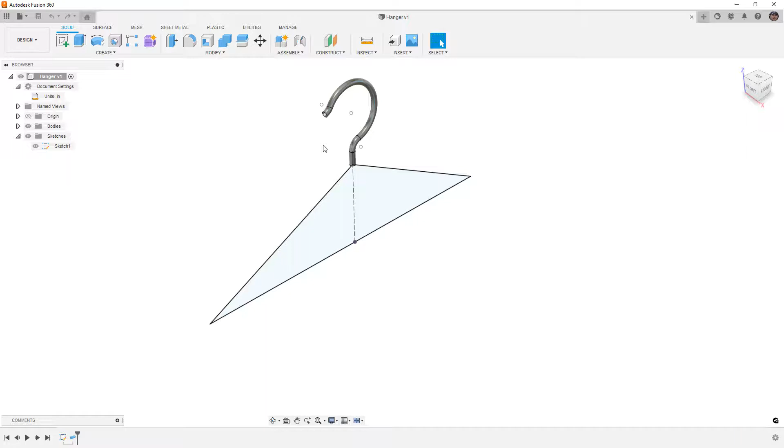But what we're going to do is use the Forms tools and try to figure out how we can model something like this. So to get started, the first thing with Forms, if you haven't seen any of the other Forms videos, is you always want to think about the starting shape.

Now we talked about this with the golf club, and in that case we ended up using, I believe it was a Quadball, but we have to really think about the shapes that we're using and how we want to build our designs.

So what we're going to do is build something that's symmetric, at least at the start, and we're going to use the symmetry plane to make sure we are keeping that symmetry, kind of preventing us from over modeling the thing.

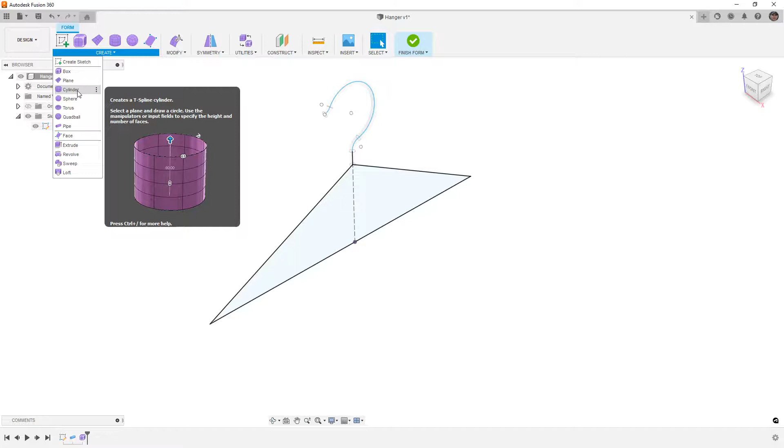And what I mean by that is we can extrude and build the cylinder out to make the shape of the hanger that we want. But the specific one I'm talking about probably is more in line with the box shape. So we're going to start with the box shape and learn how to use that to make our hanger. So I'm going to start with box.

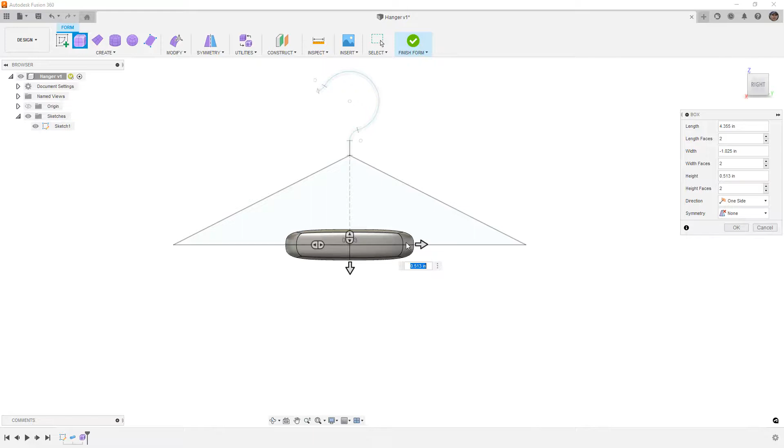I am going to begin on what is my right plane, and that is going to be my YZ plane. And then I'm going to draw this thing just centered at the origin, and this is going to be our starting shape. We're going to pull it in, make sure that we do have symmetry, and we want to make sure that we have length symmetry.

I'm going to set this to make sure that we are going about the origin. So you can see we started at the origin - that green line is right where we want it, and that's going to work just fine.

If you want to have symmetry front and back, you can also add width symmetry and height symmetry depending on your design. In this case, all we really care about is length. I'm not really too worried about any of the other parameters because it's all going to get changed.

The next thing that I want to do is instantly change this to box display, which is going to be Alt and 1 on the keyboard. You can also go to display mode and change it here.

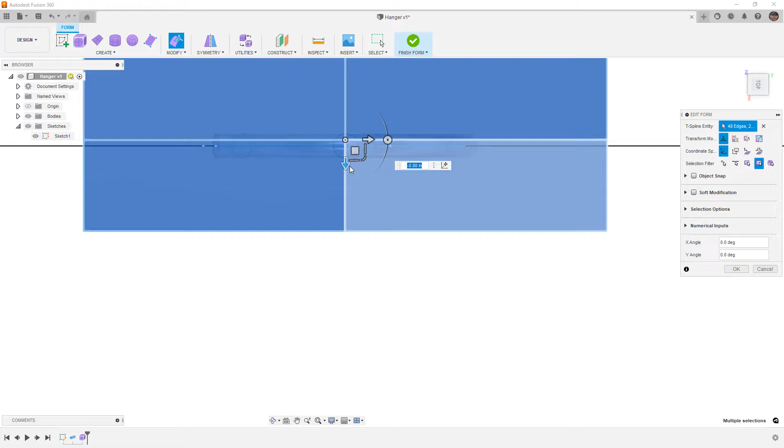I'm going to move this entire thing using modify, edit form, and I'm just going to push it back. It doesn't have to be symmetric here, but I'm just going to go ahead and push it back to roughly at the origin - looks like minus 0.75 will get me there. Then left click to deselect it.

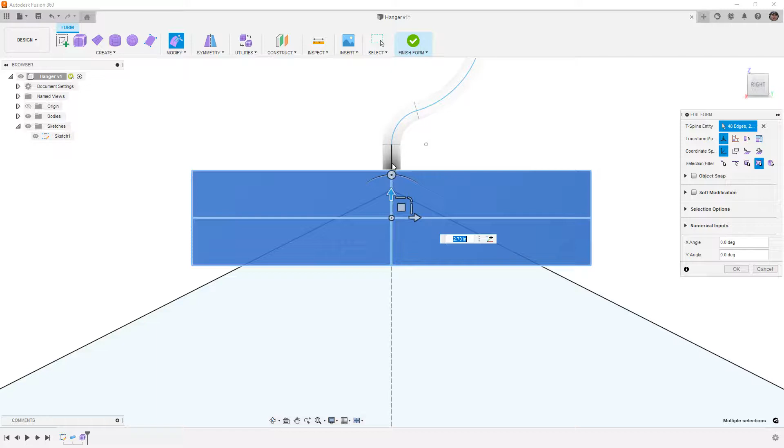Now that we have this box shape, what we want to do is push it up towards our hook and begin designing this. So I'm going to take the entire thing once more and just bring it up until it looks about right. It doesn't have to be perfect, but I am going to make sure that I embed that hook in there a little bit so that it's got a nice overlap.

Now the point where we have to start changing the shape. So the first thing that I want to do is I'm going to take this left side and I'm going to rotate it and then move it in plane. Now the reason I'm doing that is because what I'm looking to do with my sketch that I have underneath here is I'm looking to maintain a parallel relationship, at least at the start right now, with the edges of my form. So that means that this edge here, I want to be essentially perpendicular to that line. And it doesn't have to be perfect, we're only doing this visually, but that's essentially my starting point.

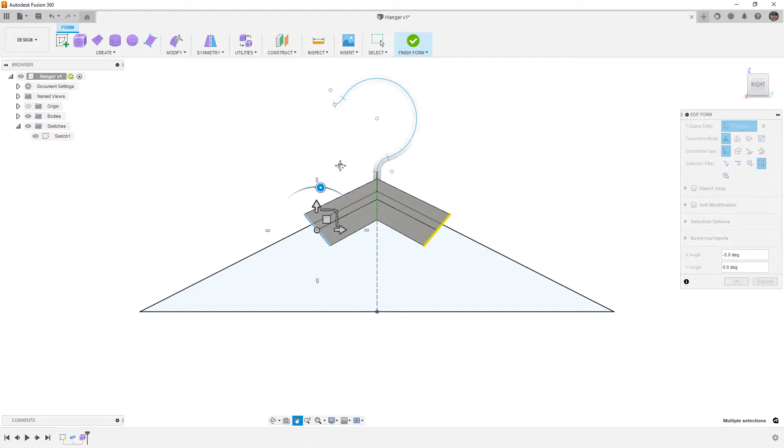Now, there is currently a potential issue with forms. If I use Alt and 1 and Alt and 3 to go back and forth between box and smooth display, it's actually going to change the dialog here. So you have to left click in the canvas area to deselect, and then you can go back and forth between smooth and box display.

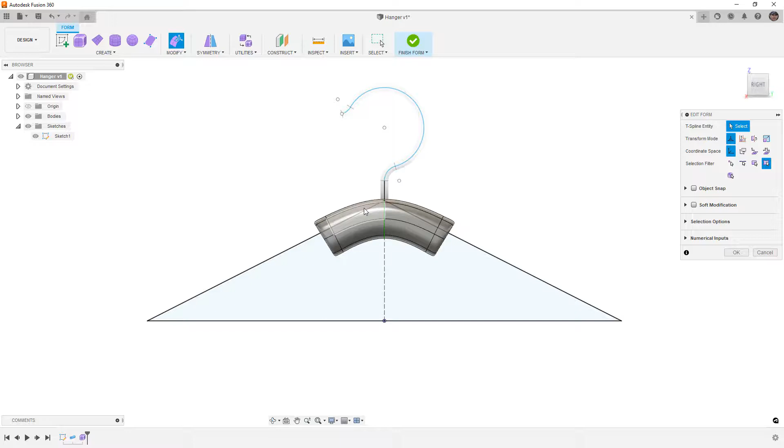So you can see here what we have is we've kind of got the starting shape here for our hanger. You will notice that these edges, when I go to smooth display, I've got these edges that are kind of floating out here. When I go back to box display, well, I can't do that because I have to deselect it again. But if I go back to box display, there is an extra set of edges here that we're not seeing. So this is a potential problem because in smooth display, we have these edges here, and then we've got this sort of rollover that happens.

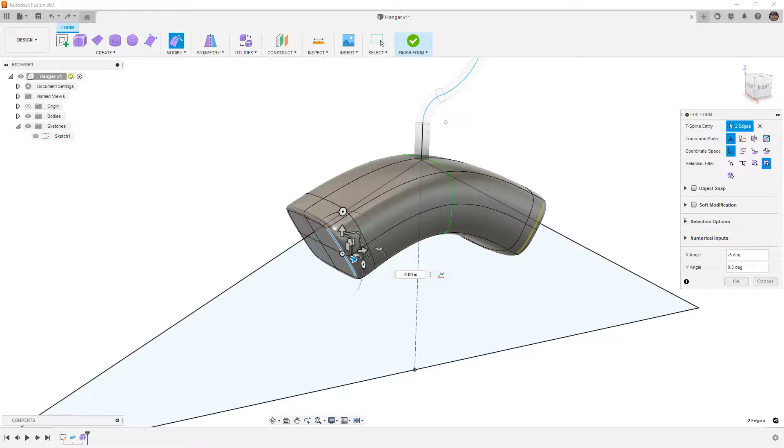So if I take a look at this edge and I go back to my selection options and I go to box display, I essentially have two sets of edges that are overlapping each other. And this is very easy to happen. It happens quite a bit when you start manipulating forms, and it's something that you need to be very careful with.

So what I'm going to do is go to smooth display, and I'm going to get out of edit form. I'm going to double click on this edge and hit delete. Now I know that doesn't look very appealing, but this gets rid of those extra edges. Now I don't have to worry about double edges here. If I start to move this, you can see we've only got the one set of edges. So Control Z to undo that move.

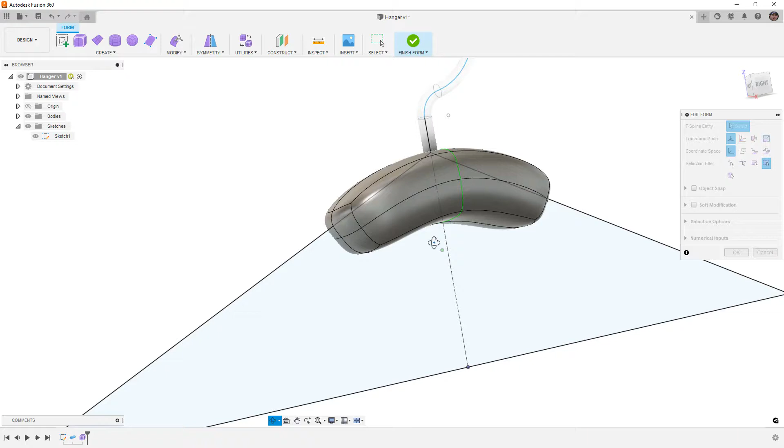Now what we have to do is we have to think about how we're going to build this shape. Right now, what we have is just essentially this melted looking square, right? We've just kind of moved a few things around. A couple things that are going to happen. We have to think about the shape in this right view. We also have to think about the shape in the top view because it's going to taper in and taper back out. So again, I like to model in box display. So Alt and 1, I'm going to make sure that I do that. And then I need to extrude some geometry.

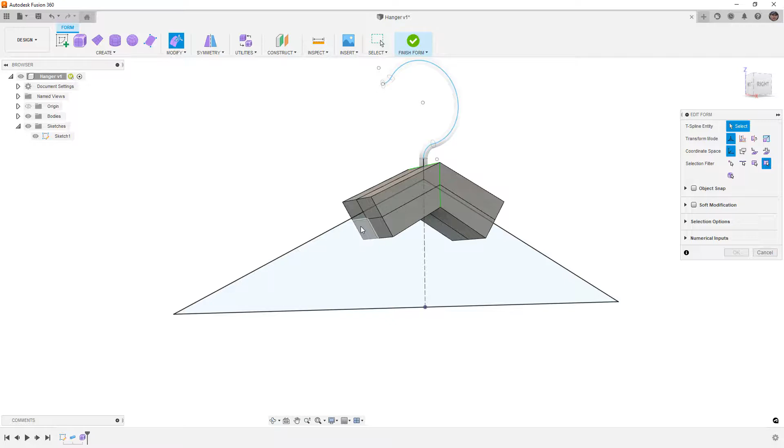Now at this point, we've got faces on the end, which kind of complicates the process. But what we can do is we can delete them if we don't want them right now, or we can select them and extrude them. So if I select all of these faces and then I hold Alt down to extrude them, what we're doing is we're essentially taking those faces and we're pulling them out. If I go to smooth display, we don't have any overlapping edges. So this is perfectly fine.

A lot of times what I'll do is I will delete those faces because then it lets me double click the edge and grab the entire edge. We have to be careful about our selection. It's always going to matter. So in this case, what I'm going to do is I'm just going to make sure that I'm kind of following the shape, but we are going to slightly taper down.

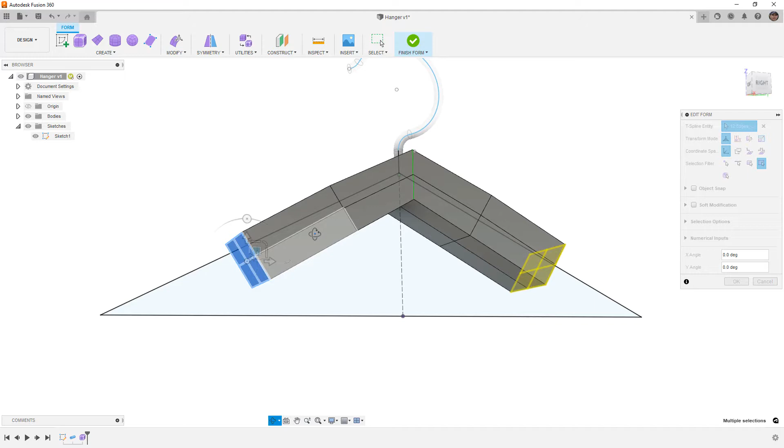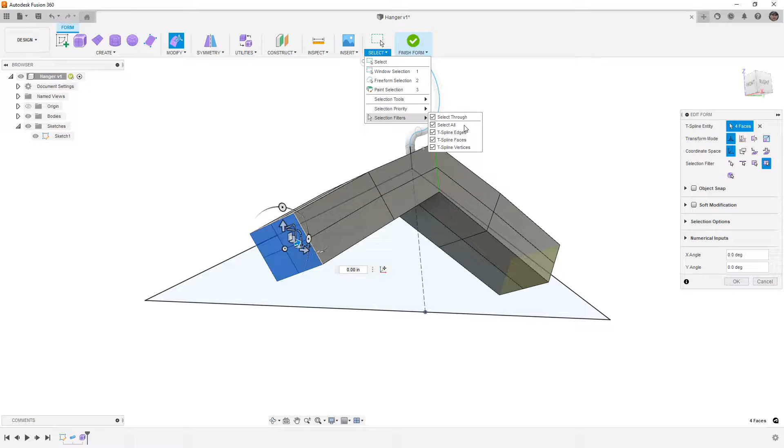And then once more, I'm going to extrude one more time, hold down Alt, and you'll notice that this doesn't work. Now the reason this doesn't work is because when we box select, we're also getting edges, and we can't extrude the edges and the faces together. So you either need to manually select those faces or go to your selection priorities and filters and only select T-spline faces, and that will allow you to do the box selection.

I typically work with edges instead of faces, so I generally don't turn off those selection filters. But sometimes if you're modeling designs like this, it'll be very helpful to be able to play around with this. All right, so smooth display, this is what our hanger looks like.

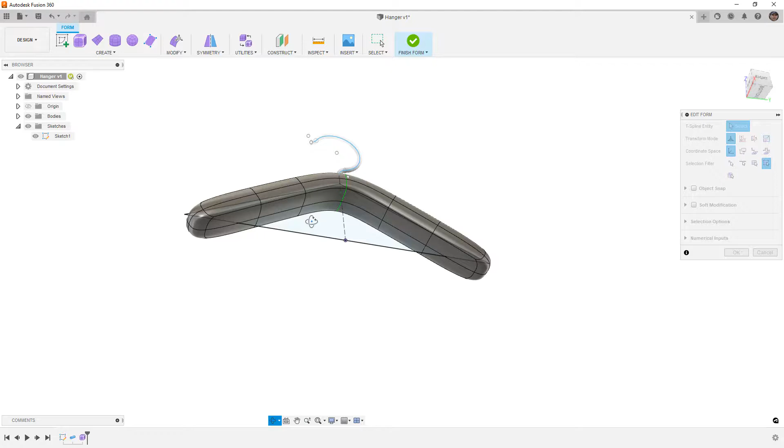It's not very appealing yet. It doesn't look very good, but we're not even close to being done. Right now, we don't need the sketch anymore, but what we do need to consider is the shape. So back to box display, I'm going to view this from the top. Now at the very top, it's going to be a bit wider, so I'm going to double click that edge, and I'm going to scale it in the X direction. So it's going to make that wider there.

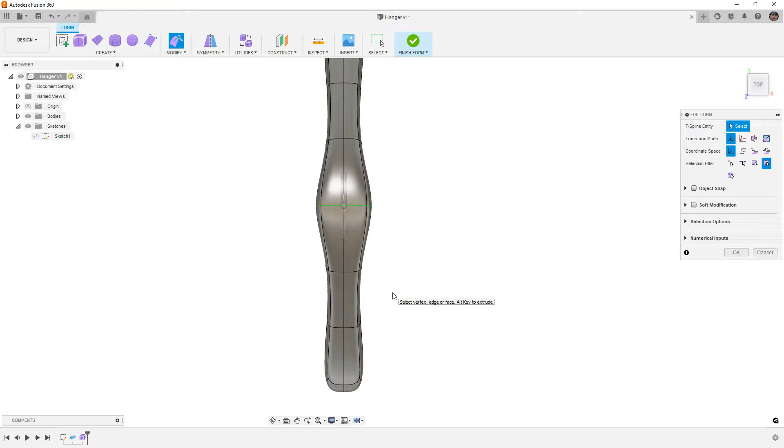And then I'm going to left click, then go to Alt 3 to check the smooth display. So you can see it's nice and wide there, and go back to box display. I'm going to take this one, I'm going to scale this one in the X direction. So all we're doing is we're changing the shape in X. We're taking this exact box shape and we're scaling it down in X. Once again, smooth display, you can see that we've kind of added a bit of geometry there.

Next, we're going to do this from another view. I think it's very important when you're trying to get these visual references that you really think about the orientation that you're working in. So now I'm going to select this, and this is a bit tricky because when we were scaling it horizontally or in the X direction from the top, it didn't really matter that we weren't in line here. But now if I try to scale this down vertically, it's going to start twisting it, and that might not be the result I want.

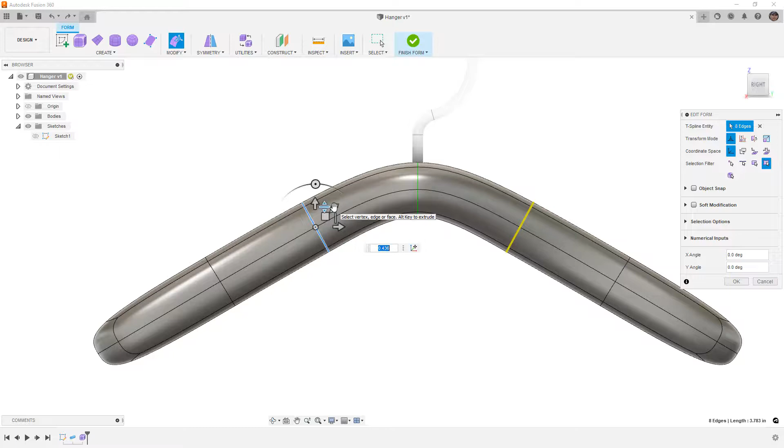We can scale down in plane, which will be Y and Z, and notice that it moves it a little bit, which is okay. And I'm going to do that again here. I'm going to scale that down, making it a bit wider at the end. So we're going to rotate this around and maybe take this one and scale it horizontally in the X a bit more just to give it a bit more shape.

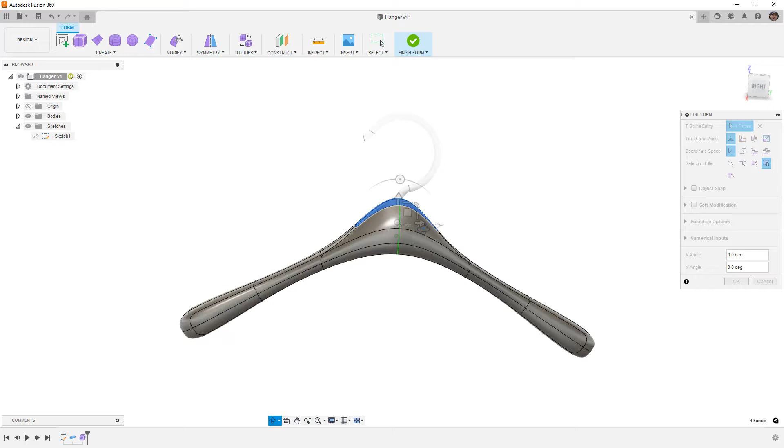Next, I'm going to select these upper faces. I need to select them across the center. I want to make sure that I get everything. I'm going to hold down Alt and extrude this up to add a bit more geometry. And with that face selected, I'm going to scale it down in the Y direction and then scale it down in X, sort of taper it a bit. And you'll notice that, again, that doesn't look very good. It's bulging up quite a bit.

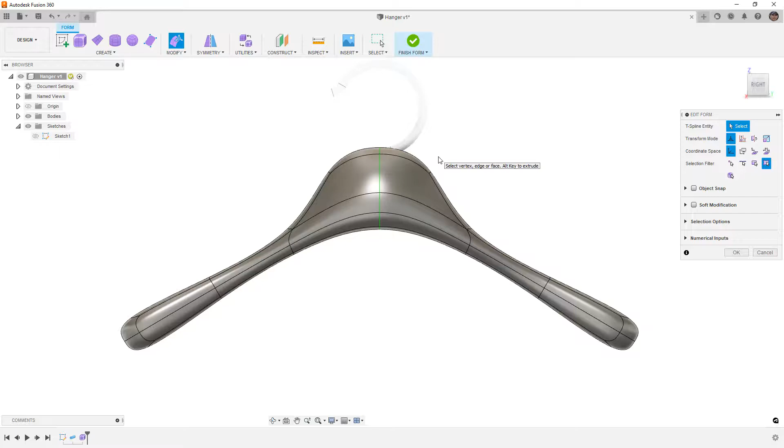Now, a couple ways that we can fix this is we can flatten that geometry. So if we take these edges here, we can pull them up to try to flatten it. And when we look at this, you can see that it's starting to sort of flatten out. But essentially what we're going to do is we're going to roughly build the shape, and then we're going to cut it later with a sketch. We want the top to be perfectly flat. So all we really care about is that we're getting roughly the right shape, and it doesn't have to be perfect. So I think that looks okay. And we're gonna go ahead and cut that away after we're done.

Some other things that we want to do is we want to change the way in which this bottom section turns. So we need to add some more geometry. The way that I'm going to do that is by going to a command called Insert Edge. We're going to double click on an edge. So let's go ahead and make sure that we're grabbing this entire loop here. I'm going to use a simple insertion mode and just drag it down about halfway. It doesn't have to be perfect. Make sure that it is simple, and we'll say OK.

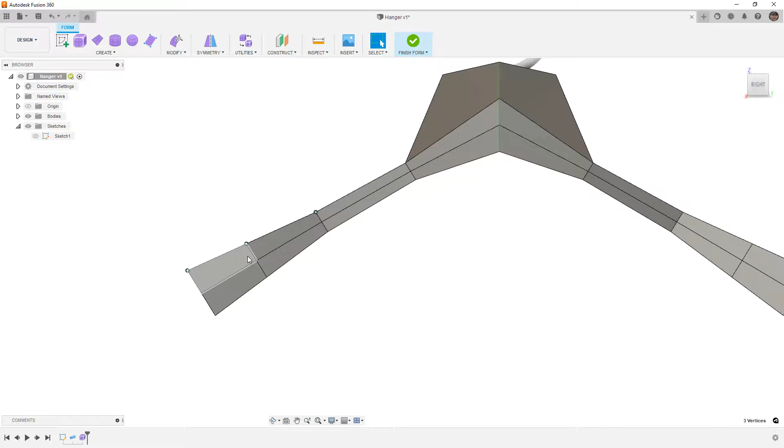Now the simple insertion mode will put the edges exactly where you say you want them. In this case, about halfway, minus 0.53, I think is what we did. But the thing that's important is that these vertices don't remain in a straight line, because this is going to affect our curvature, and it's not what we want. So I'm going to take this and I'm going to scale it down just a little bit. Then I'm going to take this edge here, and we're going to rotate this and just move it down a little bit. So when we take a look at this at Smooth Display, you can see we're starting to get that sort of transition, that arc shape.

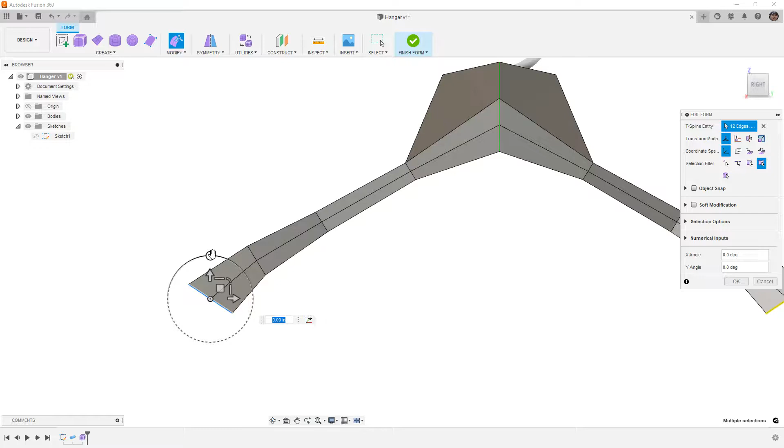I'm probably going to do a bit more work in this corner. So let's rotate it just a little bit more, maybe bring it down. We can move this one up a bit. And again, take a look. It's looking okay.

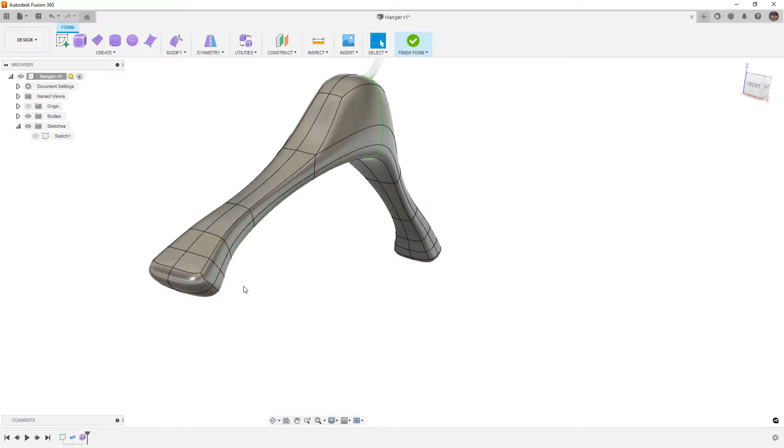I think I want to scale this in a bit in this direction and probably add another edge. So with that edge selected, I'm going to go to Insert Edge, go back to Box Display, because again, we want to make sure that we don't have just a flat section here. And I'm going to scale this one out a little bit.

I'm going to go to my right-hand view. You can double click your mouse wheel, the scroll wheel, to zoom to fit. And then I'm going to scale this one out just a little bit and move it up. So what I'm looking at here is the transition, or the change in angle for these outside edges and the change in angle for these inside edges. So when I look at this, you can see we've got that wider outside section, so it would be like the shoulder of a shirt. And then we have the sort of transitions here.

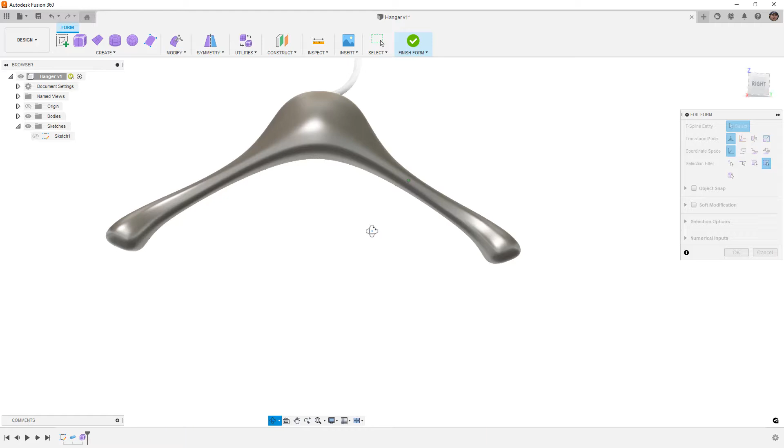Now, at this point, I'm going to use Control and 4 on my keyboard. You can also go to your display settings and go just to shaded. What this does is it's going to hide my edges, and just take a look at the shape. See if you're happy with the shape that you're getting. Now, this shape has some tighter transitions on it. Control and 6 will bring those edges back. You can also go to Visual Style, Shaded with Visible Edges.

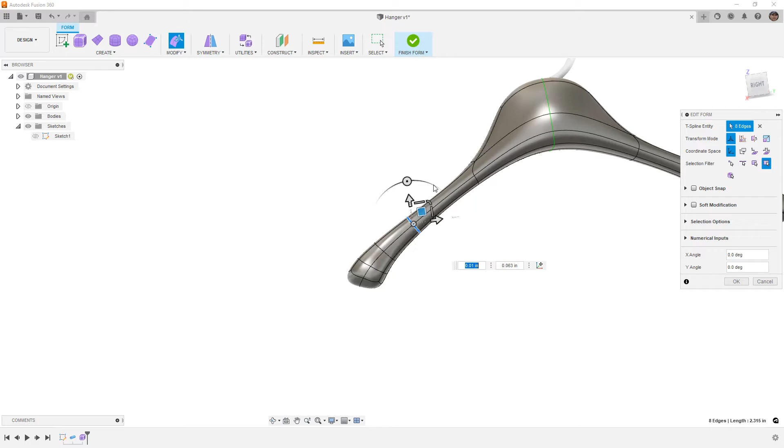And I think that I made a mistake here. I want to widen this out a little bit and maybe move it just a little bit. And I think I want to add some more control in this area. So I'm going to double click that midsection. I'm going to go to Insert Edge. Single doesn't really matter because we have symmetry. It's going to automatically add one to the other side. And then in Box Display, remember, we want to make sure that it's not flat.

So we're going to use Modify, Edit Form. We're going to bring that up a little bit. Maybe take both of these, pull them up just a hair, and then see what that looks like. I think this section is probably a bit too wide. So again, what we want to do is we want to take the entire thing.

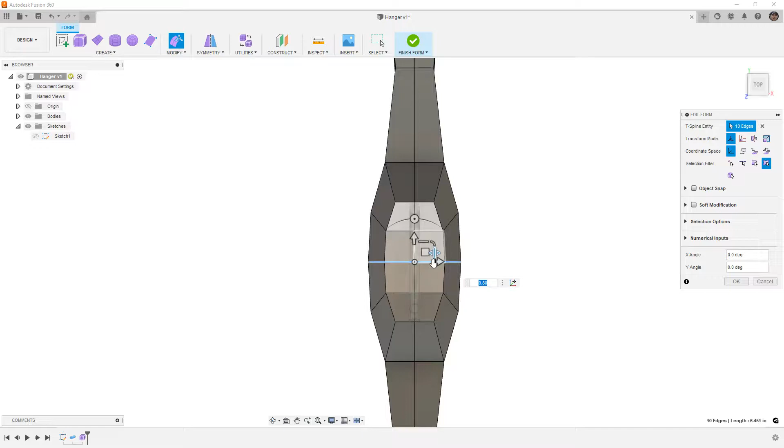So I'm going to go to a top view, take this entire edge, and I'm going to scale it in. I'm going to take the next entire edge, double clicking, and scale that in a bit. And then this one here, I'm probably going to scale that in just a little bit. It's only going to be the top just because it's not a complete loop, because we have what's called a star point here. But then let's take a look at this in Smooth Display.

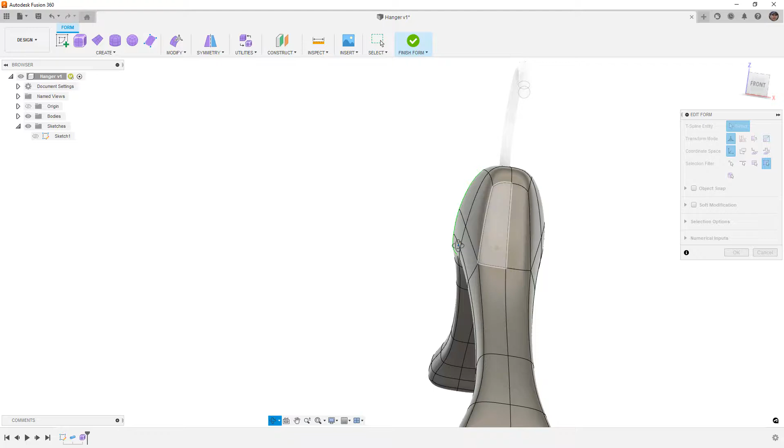So I think everything there looks okay. Remember, we are going to make some cuts to the top. We're not too worried about it being the final shape. And we are actually going to make some cuts to the bottom as well. But I think this looks pretty good so far.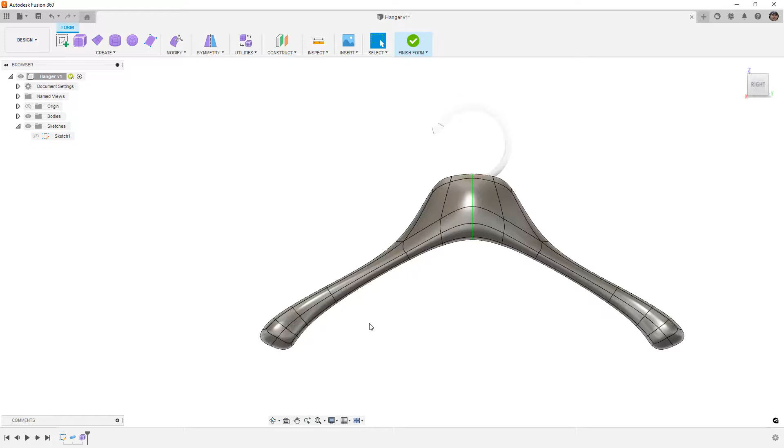A couple other topics that I want to make sure that we capture here is that we want to understand how to control the curvature. So right now, if I hide the edges, the transitions are pretty tight, but that's just based off of the geometry that we're working with. If we want those to be a bit softer, what we need to do is we need to change the shape of this edge. We need to give it a more gradual transition.

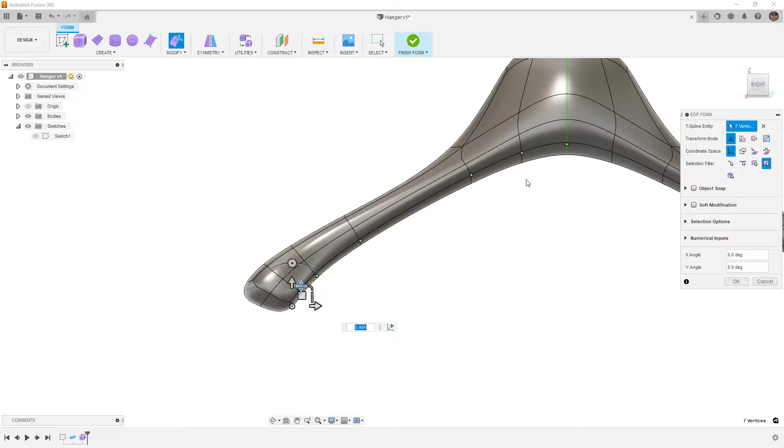So I'm going to do this with vertex selection. I'm going to go in and select all of these vertices. I'm going to go to Edit Form. Remember, we have symmetry, so I don't have to select the ones on the other side. And what I want to do is I want to move my pivot point. So this Set Pivot Point, I'm going to put down here, and then I'm going to scale this vertically. And scaling it vertically is going to bring down all of these other vertices relative to that point.

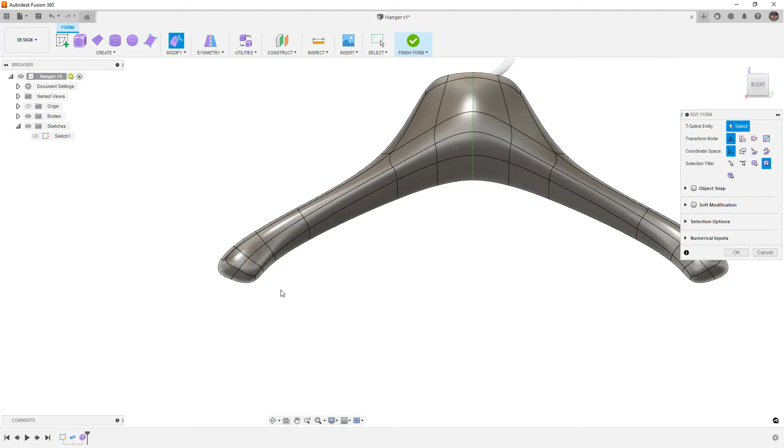So it's not going to make much of a difference down here at the bottom, or really any difference, but in the middle, it's going to soften that up. So if I rotate this around and I scale this down, you can see the middle section is getting very soft right in the middle, and down here it's staying relatively sharp. So this is a good way for us to control that transition. Now, if you want to make changes down here, obviously you can take that vertex and you can move it around.

I suggest that you do this in box display mode and not necessarily do it manually in smooth display, because it can be very easy to sort of get this thing out of shape. Another thing that you want to think about is whether or not you need all of your edges. So in this case, I'm going to take this mid edge, and I think that I need it, so I'm going to scale it out just a little bit, and this is going to soften that shape once more. So we're going from a fairly hard transition and we're softening it up. So it's going to round out that shape and just give us a little bit more transition.

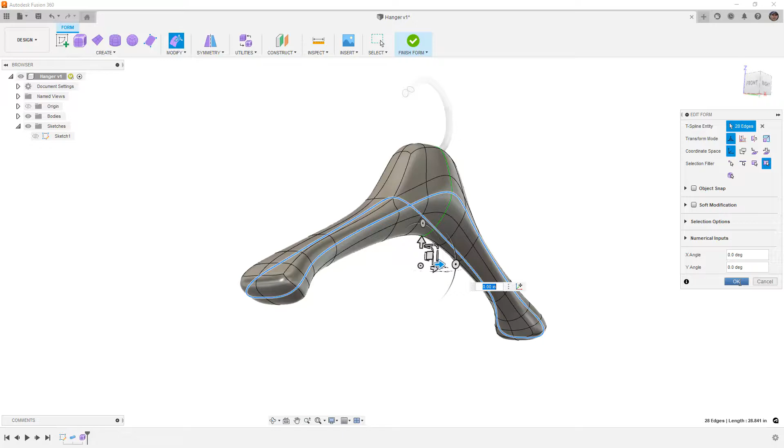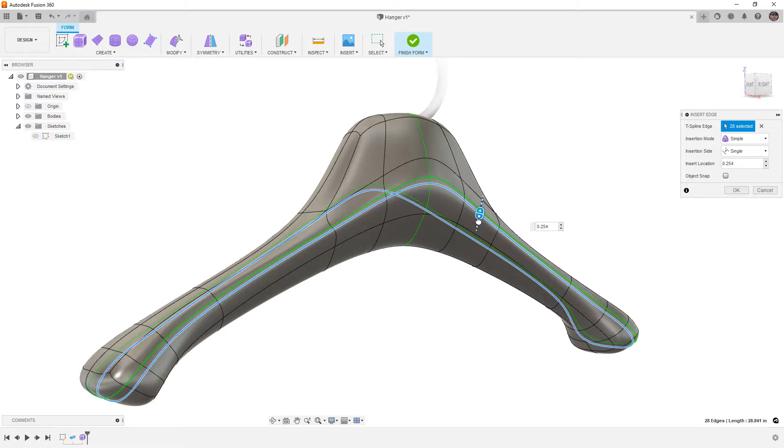But what if I wanted this right here to be a harder edge? So right now it's very visible, but what if I wanted it to be a harder edge or a harder transition? Well, the way that we do that is by inserting additional edges. Now, this gets a bit tricky simply because we want to avoid those flat sections because it's going to produce bad geometry. So we have to put an edge in here, and I'm going to put it relatively close. I'm going to say about 0.1 somewhere.

And then I'm going to go to box display mode. I'm going to go to modify edit form. I'm going to take that entire edge that I added in there, and I'm just going to scale it out just a little bit. So if I click the scale in the X direction, I'm going to do 1.01 and just see what that looks like visually. If I go to my smooth display, Control and 4 to hide edges and rotate this thing around, you can see now we have a nice crisp edge. And that nice crisp edge carries all the way to the end.

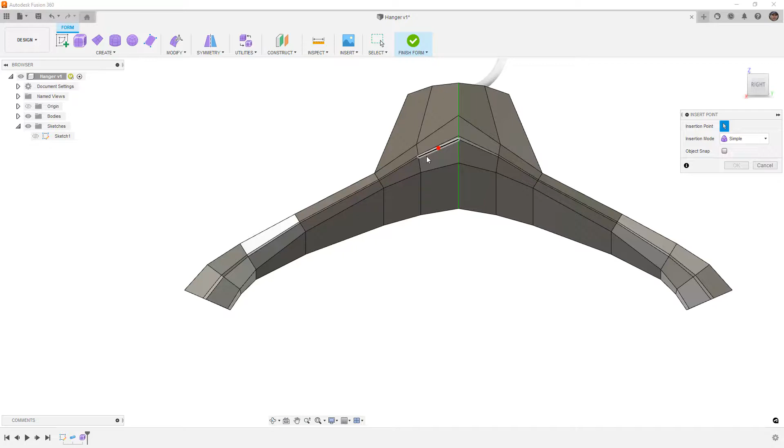And really what I want is I want it to disappear down here, but I want to keep it up here. So the way that we get it to disappear is by transitioning the thickness of that edge, by transitioning it wider as we get further down. And in order to do that, we're going to use insert point. So we have a nice tight edge here. And as soon as we get here, what I want to do is I want to space it out. So I'm going to start clicking that point. I want to maintain the change in angle between these edges. If we click a red point, that's going to be the middle, and that's okay.

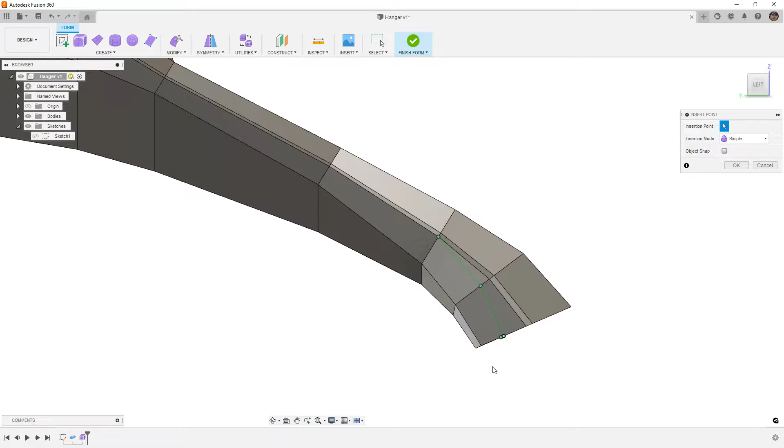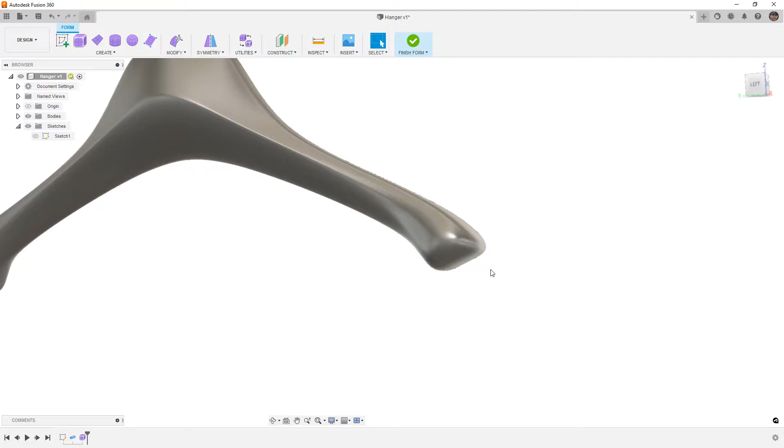I'm going to rotate this around, view it from, in this case, the left, essentially the back. And then what we want to do is we want to carry on from here, going up and coming back to this point. And once we have that, I'm going to double click this edge, which should grab everything that we want to replace and just hit delete on the keyboard. Now, if we take a look at this in smooth display, if I hide my edges, that tight transition should now begin to fade away. So it's relatively tight up here in the center, and as we get closer to the bottom, it sort of tapers away. So that's how we would control those edges in the edge flow. You can see that it's still tight on the back, and then right where we added those edges and we started to transition it, it starts to fade away.

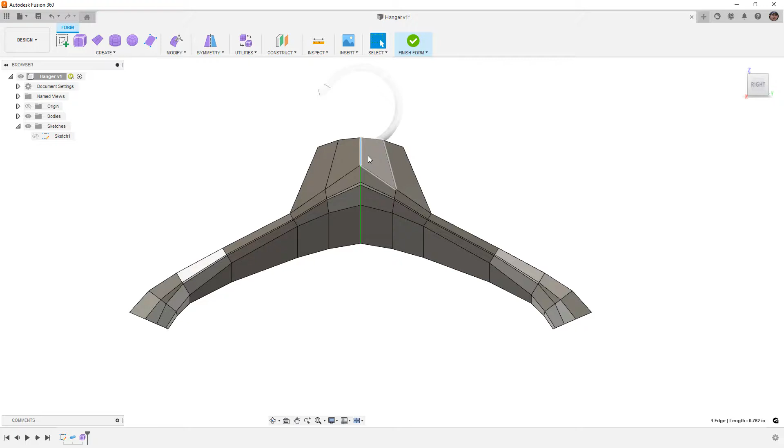Now there is one more piece of this puzzle that we want to make sure that we explore, and that is going to be the utilities and make uniform. Now, make uniform is something that helps with star points, or essentially it's meant to help reduce tension in these star points, but it also has another effect. If we take a look at this in box display and then we go to smooth display, you'll notice that things like the length of this edge are different between the two. Now, when we run the utility make uniform, it's going to take those tight areas and space them out, and the big areas and contract them a little bit.

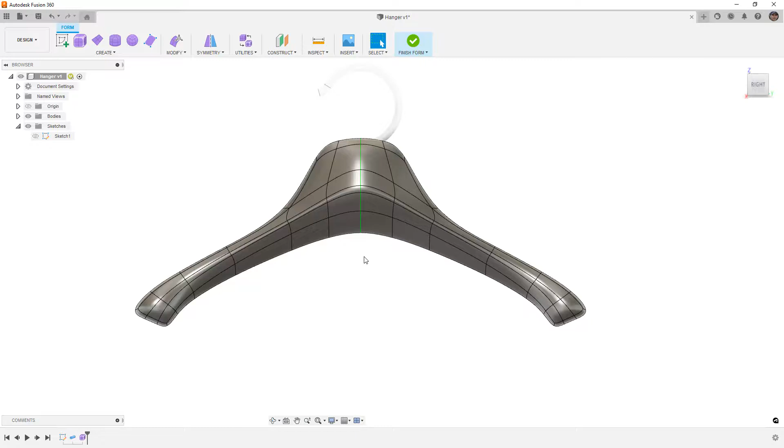Now, if we say okay, you can see that this edge got shorter, this one got a little bit longer. Now, it's important that we do run that because it helps us ensure that the surfaces we're creating have the least amount of tension, but it is also important to double check your shape. Make sure that the transitions that you wanted are still there. Now, because this is a clothes hanger, we would want all the transitions on the top to be relatively soft, and all the ones down here are really just more for a stylized feature.

So if you want to make any changes to those, again, what we can do is we can add additional edges. Just for the purposes of this video, I am going to add another edge because I want to show how we can do this around the star point. So if we go to modify and insert edge, and I double click this edge, it's only going to go down to here. And that's because this is not an entire loop.

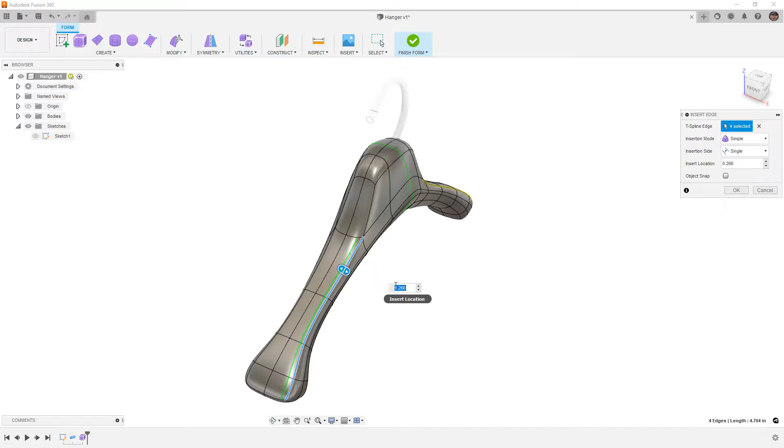What we're going to do is we're going to control the curvature we want on this edge, and then we're going to manually carry it on to the rest of the geometry. So I'm going to put it at about 0.25 and say, okay, I'm only going to do this to the front of the design, not the back, just because it's just an exercise really. I'm going to go to box display, and you can see what we have is we've got this edge here, and I want to make some adjustments before I continue to add additional edges.

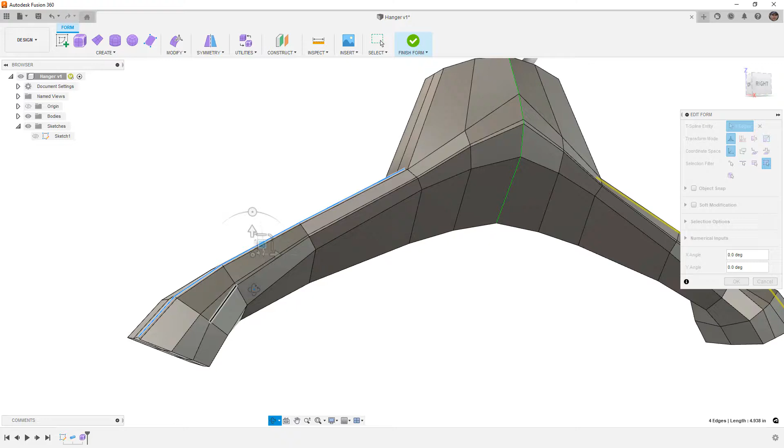I'm going to view this from my right side, double click the mouse to bring it back, and I'm just going to move this up a little bit. Remember, we want to avoid having a completely flat section. Now, moving it up is going to produce some problems, but these are all things we're going to fix. The problem that happens is we have what's called a T-point. This T-point is when one edge ends in the middle of another edge.

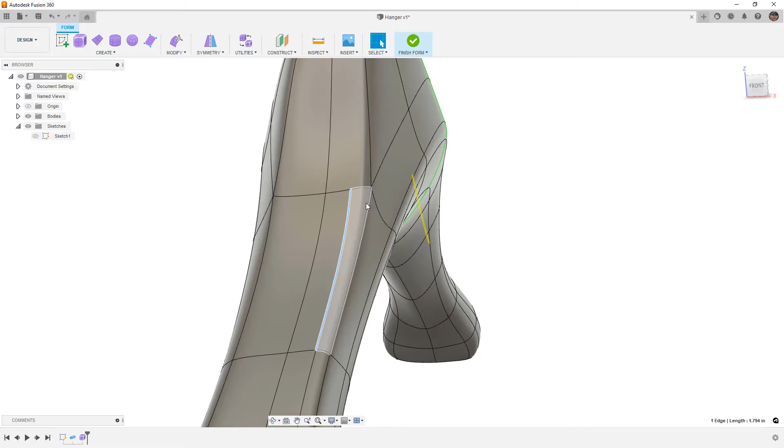And that's okay in Fusion 360 forms, but as soon as we start manipulating that geometry, the surfaces that we get in that area can oftentimes be problematic. Now, when we take a look at this, it doesn't look too bad, but it's always a good idea for us to really think about the curvature and manually control it whenever possible.

So I'm going to use insert point, and I'm going to bring a point up to here and just take it over to that midline and say okay. And once again, we don't want a complete flat section, so I am going to go to my right view and just make sure that I add a little bit of curvature. So you can see that there is a consistent width between these edges, and then it gets a little bit thicker down there at the bottom, which is okay for now.

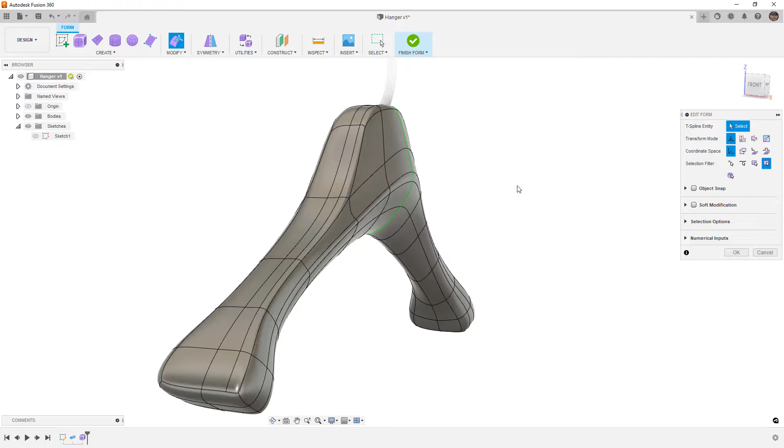And then I'm going to take a look at this in smooth display, Control 4 to hide my edges. You can see now we've got that tighter transition on the front, and we've got the softer transition on the back. One could be the front, one could be the back, it doesn't really matter. However, we're not quite done yet. And the reason we're not quite done yet is because we have this T-point to deal with.

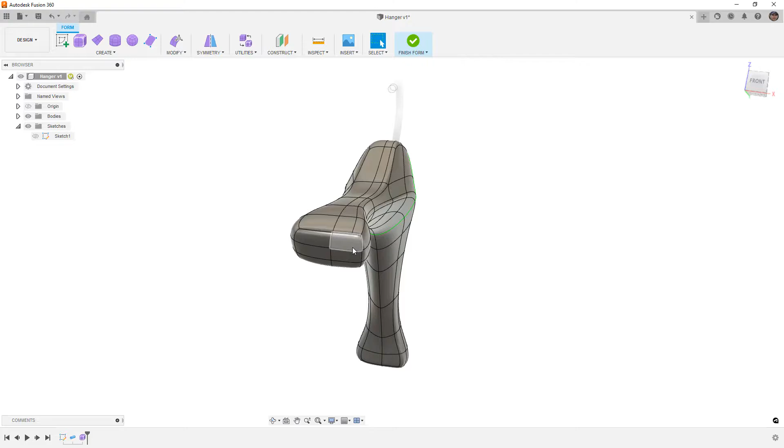Now, as I mentioned, it's not necessarily a bad thing. You can have a T-point if you want. But again, I like to make sure that I'm controlling this geometry as best I can. So what I'm going to do is I'm going to take this edge all the way to the other side. I'm going to go to box display. And once again, I want to make sure that I have a little bit of curvature here. I want to make sure that it's not completely flat. So I'm going to pull that down and maybe bring this vertex back just a little bit.

And now we have to deal with the issue on the inside. Now, what we did originally was we took an edge. Now we went from here, I'm going to control double click. And this time I don't want a tight transition. I want it to be a bit wider. So I'm going to bring this all the way down to about 0.5.

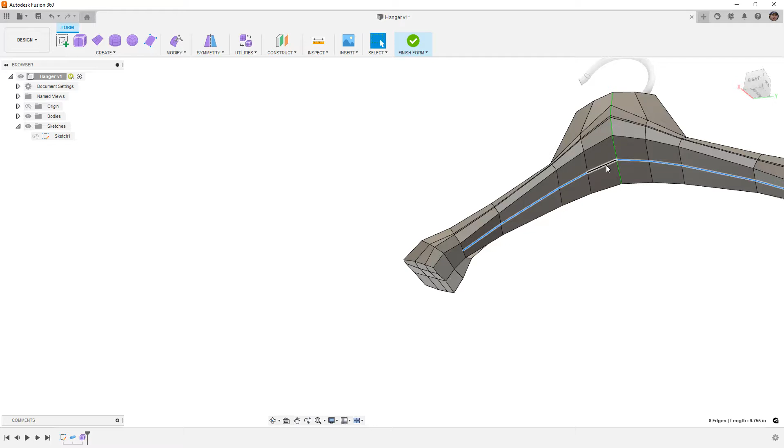I'm going to take this edge and I'm going to scale it down because I want to make sure, again, what we're doing is that we are maintaining, we're going to pull this out just to give a little bit of curvature. We're maintaining that smooth transition. I don't want to add another creased edge. And once we do that, all that's left is to connect these 2 points.

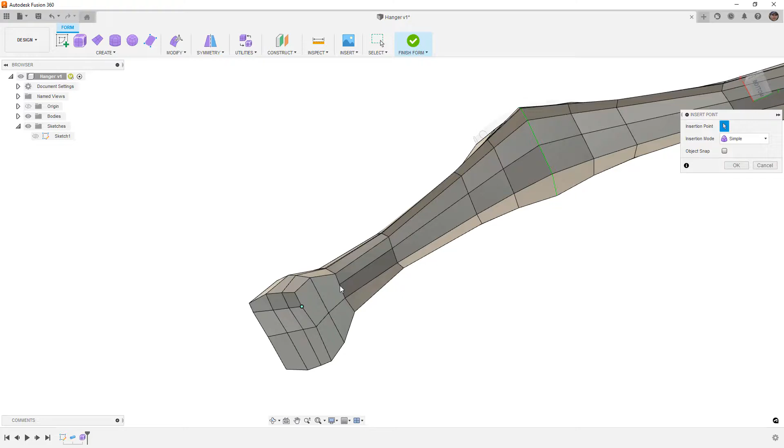So once again, we'll go to insert point, here to here, hit enter. Make sure that we have at least a little bit of curvature here. So this is going to be that one vertex. I'm going to go to my side view and maybe pull that out just a little bit, and then take a look at this in smooth display. So once again, Control and 4 to hide the edges.

So now you can see that we've got a tighter transition up here. We've got a tight transition here that fades away. And underneath, even though we added those edges, we don't really have a hard transition except for right in the middle where it goes. It's basically this hard edge that goes right between the middle, but that's okay.

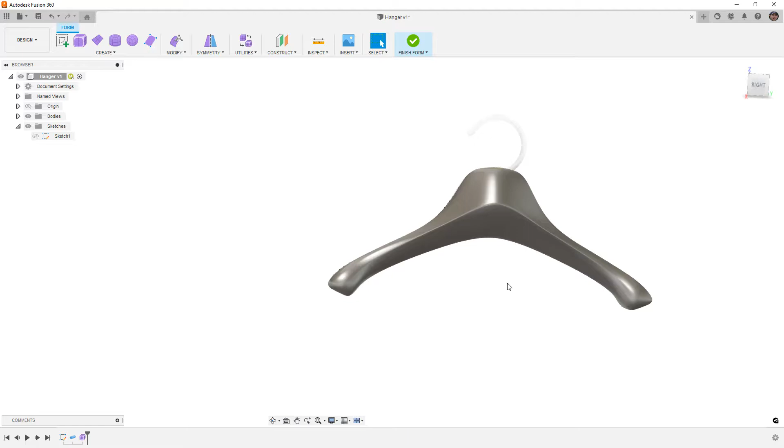So at this point, that is basically the shape that I'm going for. However, this is not the end of the story. What we need to do now is convert this to a solid body because it's completely closed, and then make some additional changes.

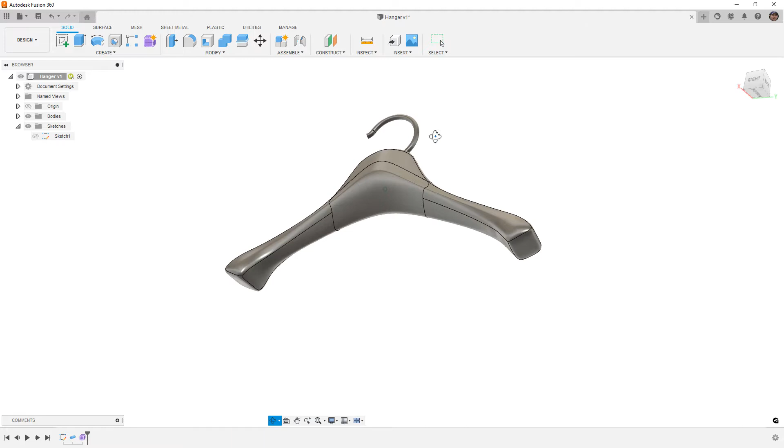So I'm going to finish the form. You'll notice that we get some edges on the design, but those are just based on the conversion. If I hit Control and 4, everything still looks smooth.

Now we've got this hanger part on the top, and what we want is a flat section up there. To get that flat section, there's a couple different ways we can do this. Probably the easiest is to just extrude a rectangle. We can also use split body, or make a surface and replace the face or split it. There's a bunch of different ways to do this.

For me, I'm going to create a sketch. Since everything was based symmetric about the origin, I'll start with my line tool, draw a vertical line, hit the green check mark, and then draw a horizontal line. The reason I do this is because I've got a midpoint constraint that can go between these two, so I can make sure my horizontal line is at the middle. Then I want to select this and convert it to construction, because all I really need is that horizontal line. So I want to figure out where this needs to be, and I'm just going to put it about right there.

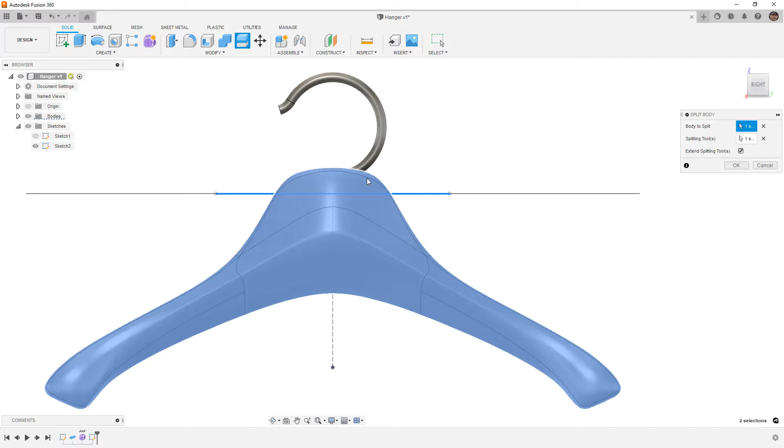And now I've got split body. The body to split will be the hanger we created, and the splitting tool is that sketch. We're going to allow it to extend out, and what this does is leave us with two solid bodies. Now we have the original hook up top, we've got this little piece here, and then we've got the main body. Essentially, we've cut that away.

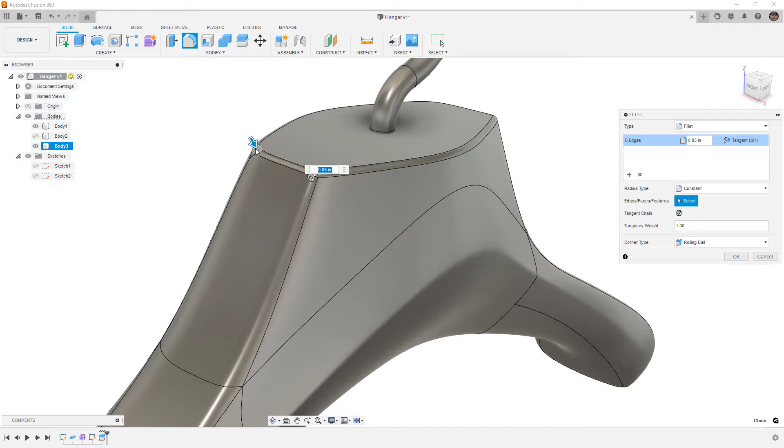Now, theoretically, we can add a small fillet here. But the problem you run into with something like this is that you get these little artifacts, these areas where it's got this little section of an extra surface. Sometimes you can get away from this by just cutting a little bit deeper or using a smaller fillet. In this case, we're going to have to either use a smaller fillet or cut a bit deeper to get away from that, so I'm going to hit cancel.

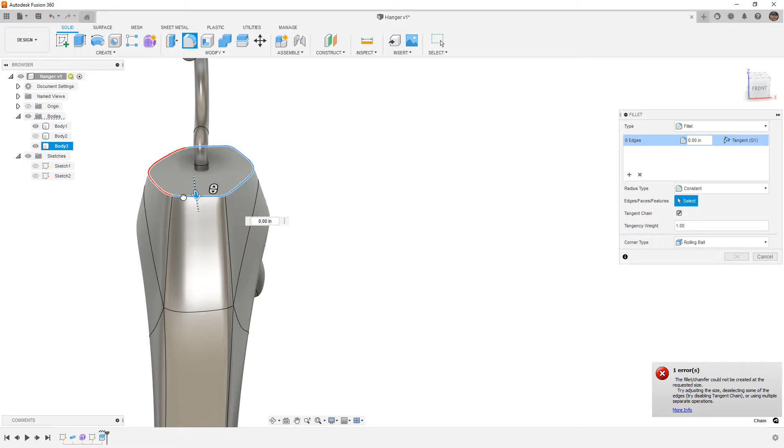I'm going to go back to my sketch, and I'm just going to pull this down a little bit deeper and make sure it does go completely below that corner. Now everything should update, everything should be fine, and the fillet hopefully will work a little bit better. So if I pull this down, let's go ahead and try this again. You can see the reason it's failing is because we're going past the radius of curvature in this corner.

But 0.075, that's okay. Some other things to think about if you're making a design like this: you can have a tangent or curvature continuous fillet. A curvature continuous fillet will take the curvature of the surrounding geometry, in this case a flat top, and it'll allow a little bit different of a transition, a little bit smoother. If I go back and forth to tangent, you can see how that looks different. For this example, I'm going to stick with tangent, and I'll just say OK.

I haven't saved this thing at all, so let's do a quick save before we make any final adjustments.

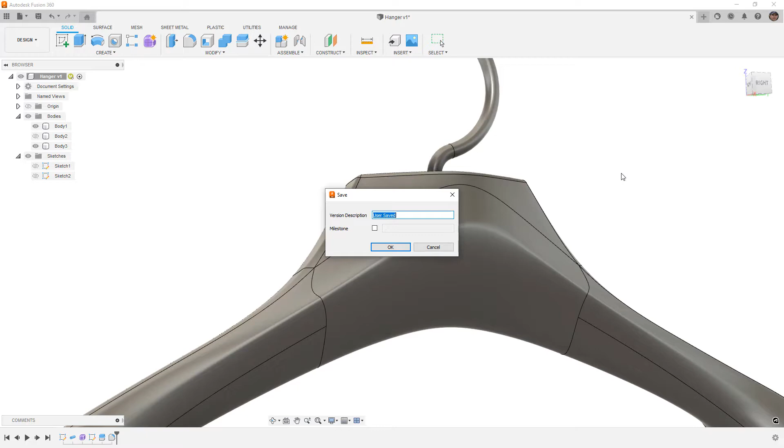The last thing we might want to do is create some flats on the bottom. Now, the shape looks pretty cool, but a lot of times you'll see that hangers have flat sections, maybe a bar across to hang pants on or whatever the case might be.

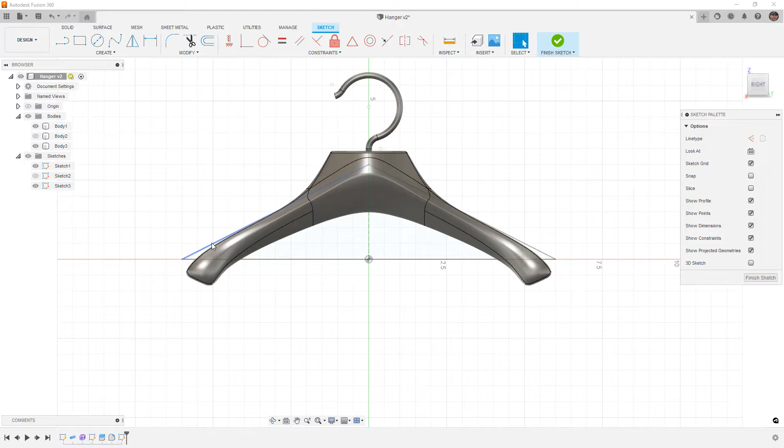So we're going to do this in the same method. We're going to create a sketch. I'm going to take a look at my first sketch - you can see that the original lines we used, we kind of changed the shape a little bit, but that was only for guidance. I'm going to follow the same procedure: I'll do a horizontal line, snap this horizontal line's midpoint to the origin, and then use this to create my triangle. So I'm going to hit escape to get off my constraint.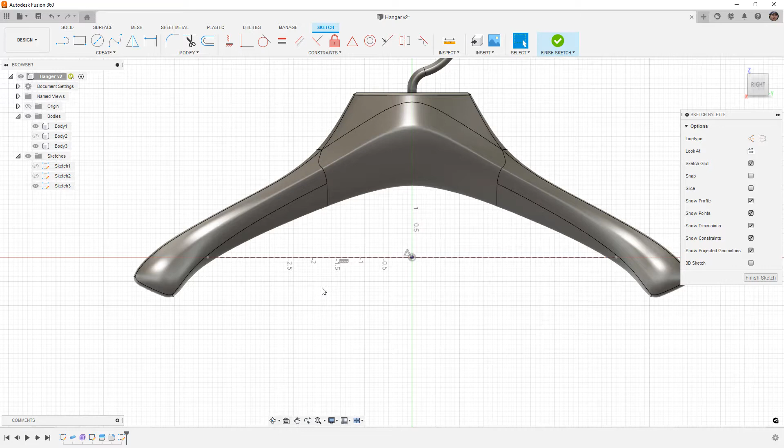I'm going to find where that hits, and turn this into construction since I don't need it. Then I'm going to create a line that comes up vertical to the origin, and there'll be a line down here that's going to be parallel or collinear to this one. What I'm looking to do is make sure it cuts all the way through the solid.

Once I have that, this vertical line can be construction, which is X on the keyboard, and then I'm just going to mirror these two lines to the other side. What I can do is use this as a split tool, but right now with the mirror, I can move it around.

I can drag this out to the side a little bit and figure out where I want that angle, if I want this to be up a little bit higher, and just sort of play around with the shape until I'm happy. When I'm happy, we're going to finish the sketch.

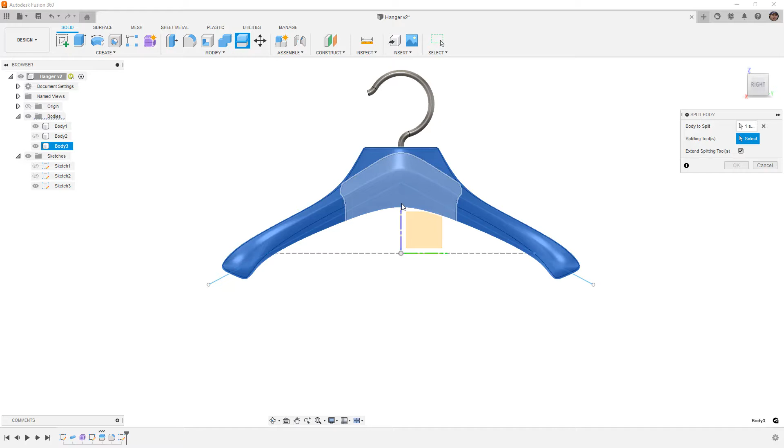We're going to once again do split body. We're going to split the hanger, use this as our split tool, and then we should have a body for the bottom. Once we're done with these bodies, we can select them and right click and remove them. We want to make sure we don't delete them, because the references will also get deleted.

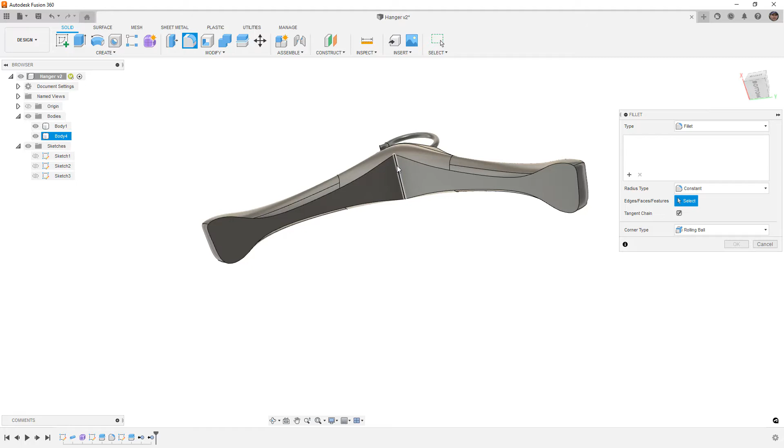Now, some interesting things happen here. First, we want to make sure that we fillet the center. We want it to be rounded, and we can kind of do this visually based on the angle that we have here. That looks pretty good.

But the other thing we need to be aware of is the transition that happens in these corners is going to be the limit to our fillet. So if I try to fillet this and begin just dragging it, you can see that we instantly get some issues.

Often those issues are around just the fillet size, and you can see Fusion is thinking really hard. It's trying to see if it can figure out a way, but part of the problem comes because when you start dragging this arrow, the scale is pretty big relative to whatever fillet size you're trying to do. You can see right now it's trying to solve a 3.5 radius fillet.

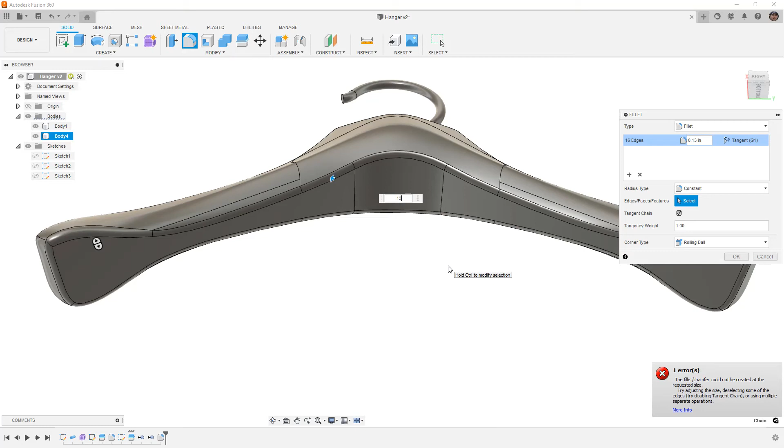If I instead do something like 0.01, you can see that it's fine. What I suggest when you get to a complex design like this is that you manually increase that value and figure out what size fillet is going to be okay for you. You're going to get to a point where it's going to fail. You can see 0.13 is okay, 0.14 it fails.

Now, if you want to have a variable fillet, now that you know this number, this is sort of the minimum that happens probably in this corner right here, you can change the fillet type from constant to variable, and you can begin to add some points.

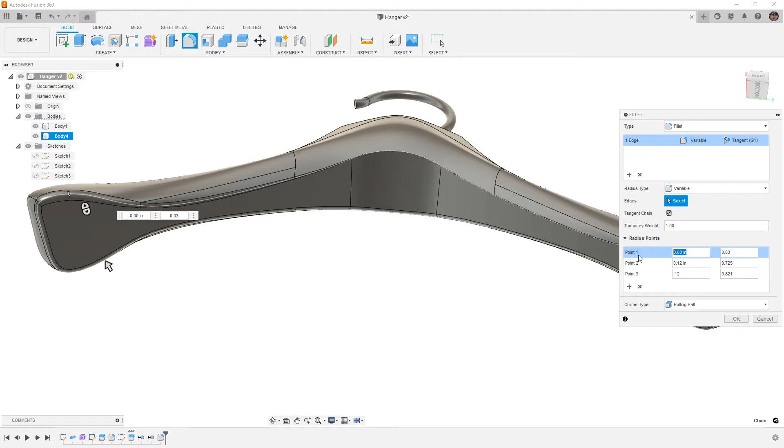So in this corner, we want to make sure that these are 0.13 or 0.12. And this point right here, I'll do 0.12. And then this one up here can be a bit larger. So if we want to go larger up here, we can do that.

Now we will have to make sure that we come over here and also do the other 0.12 to make sure that we are limiting that fillet in those corners. And we'll do 0.12 here. But what that allows us to do is pick up on these different spots, have a larger fillet so it blends a bit better, and then we can decrease it in the corners that are the problem.

Now, obviously, the best option is for you to figure out those transitions and those shapes in the form body. But often when you need something that's perfectly flat, so like in this case, we might need something that is truly flat, that is really not reasonable in the form. We can use the flatten tool, but it has to be up against a creased edge to even have any kind of chance of being flat.

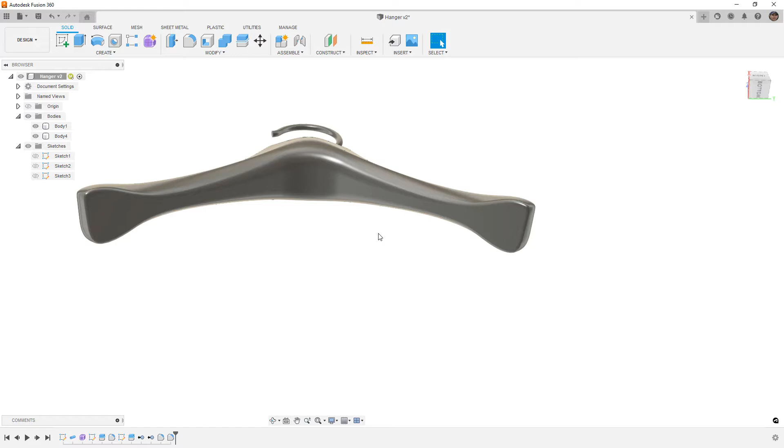Now, it's usually not the best option. And in this case, using a tool like split body with a sketch after the fact is going to be the best way. But you can see here that the transitions are going to cause problems in these corners, and these are going to be your limitations. Obviously, the half inch fillet up here is pretty big, and that's fine. But down here in these tighter corners, this is where you're going to run into your issues.

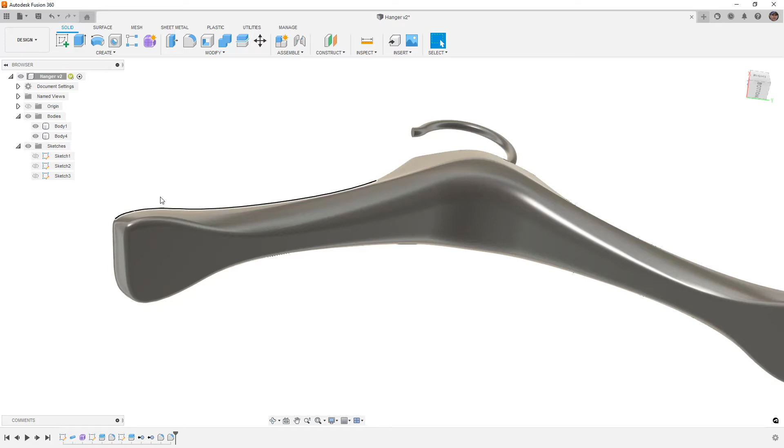I think that's as far as I want to go with this. We can take a quick look at rendering. I also want to note that there is an appearance, so I'm going to hit A on the keyboard.

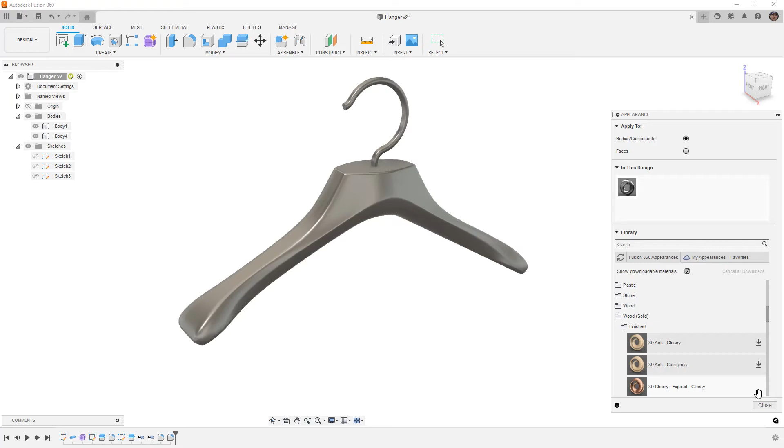When you go into the appearances in Fusion 360, under wood, there's an option called solid wood. Solid wood is interesting because it lets you cut away from your model and the grain of the wood will be carried into the design. This allows us to see the grain as it would happen if we were to actually cut through the model, which is a neat way to get a design like this if you're going to have it cut out of wood, to have it mimic real life.

So those 3D finished woods are pretty cool, and you'll notice they do show properly as you're cutting through solid geometry. So if you ever wondered what that was, that's kind of the case. They also have really realistic bump maps on them, so you can see inside here it really looks like the grain of the wood, giving it a realistic touch.

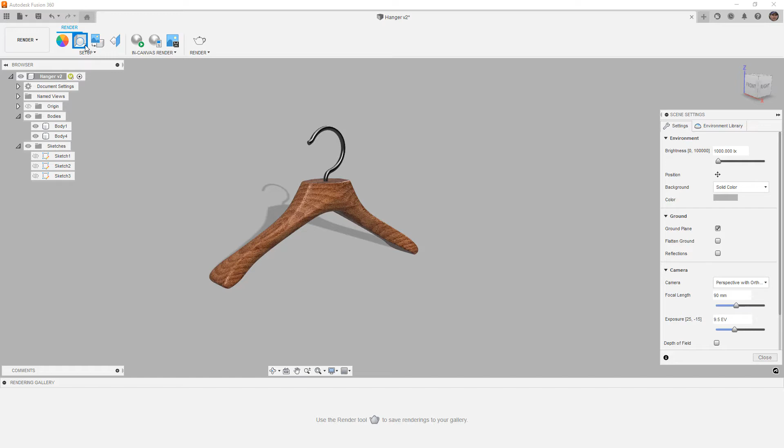I'm going to do a quick render on this. I'm going to change the background to environment, and under my environments I'm going to use the photo booth. This will give me a good light. I can also increase this - I'm going to go to maybe 1500, give it a bit brighter, make the cherry pop a bit.

And I'm going to flatten the ground. It'll give it a little bit of a lighter texture. Flattening the ground is going to take the HDR image, which is somewhat of a sphere, and it's going to flatten the ground portion of it. Typically what that does is it'll distort where the ground plane meets the rest of the HDR image.

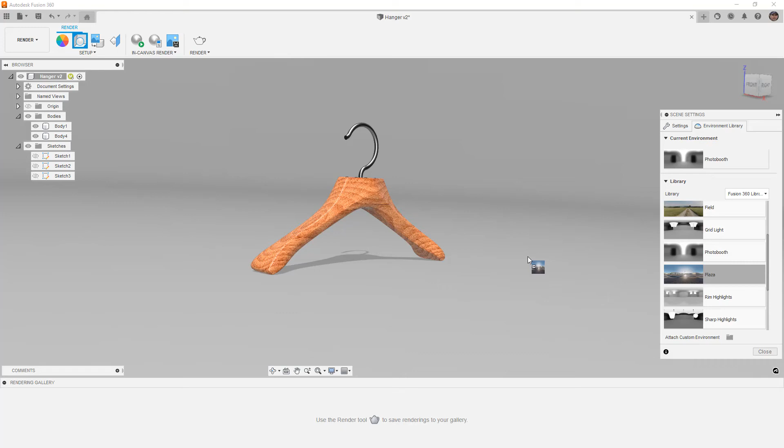So if you're in something like Crossroads or the Plaza, for example, you'll notice a big difference where the plaza meets the buildings. You can see back here, if we turn off flattened ground, where the ground plane is really supposed to be - the sidewalk is there, but you can see the gutters coming down. As soon as we flatten the ground, it's essentially cutting off a portion of that depending on the scale, and the further we get away, if you're rendering a big object, it looks quite a bit worse. I'm going to double click on this, bring it back in view.

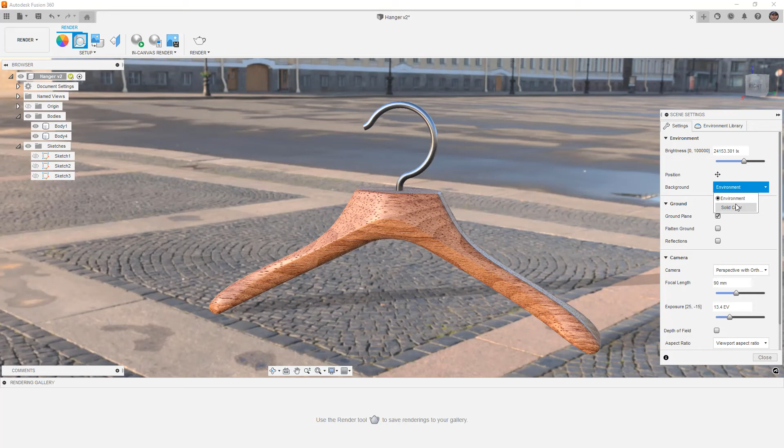But that's something you really notice if you're dealing with a scene that has a true HDR image. The photo booth and any of those studio type scenes, you don't notice it because it's all grays and whites. One thing you can also do, instead of showing the background, is show a solid color. We could make this perfectly white, and then all we really need to contend with is the lighting.

There's not going to be a reflection of the plaza because we're dealing with wood - you're not going to actually see any of the reflection, just the highlights from the sun. If I were to do this, I would likely turn off the ground plane altogether so we don't see a shadow. You do need to consider whatever metal you're using - in this case it's kind of like a matte steel by default, so you're not going to see the reflection of the plaza.

You can kind of see it here - if you get in real close, you can kind of tell. But those are things you should be mindful of if you're trying to create a render. This looks pretty good, we can go ahead and fire off a render of this, but that's going to be the end of this practice video.

At this point we've practiced forms quite a bit. I always think we've hit the end of what we can do with this, but I always get another question. So we've covered a golf club, a clothes hanger, earbuds, a helmet, and obviously tons of different car parts. If there's something else you're trying to model, there are also a few things I've been doing for clients that I won't mention here, totally outside of cars and everything else we've done.